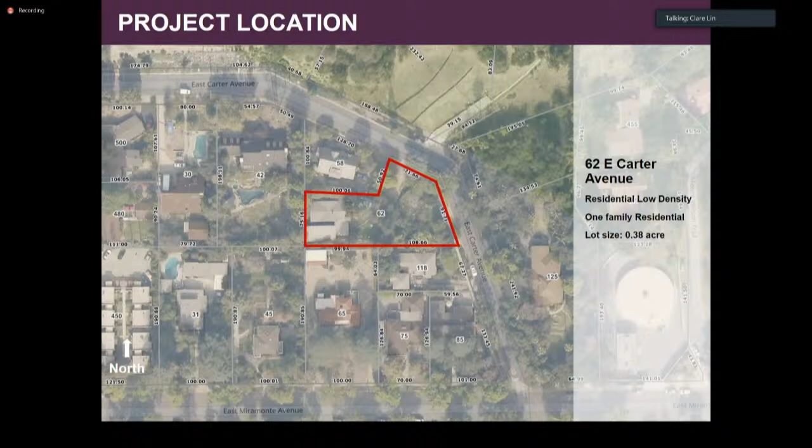The Planning Commission reviewed and approved the project on the property to develop a single family residence and renovate the existing structures back in 2018.

Since then, the ownership has changed, and the new property owner wishes to modify the approved application to construct a 2,330 square foot single story, single family residence, including a subterranean basement and a garage to be excluded from the gross floor area calculation.

The total gross floor area is 4,161 square feet, including the existing structures.

Pursuant to the code, any structure addition to a lot greater than 11,000 square feet in size, resulting in a gross floor area greater than 3,500 square feet, shall be subject to granting of a design review permit.

And the project qualifies for a categorical exemption under CEQA, as it involves additions and alterations to a single family residence.

Here are photographs of the site. The property is under rehabilitation. At the top row, you can see photos taken from Carter Avenue, looking south and looking east.

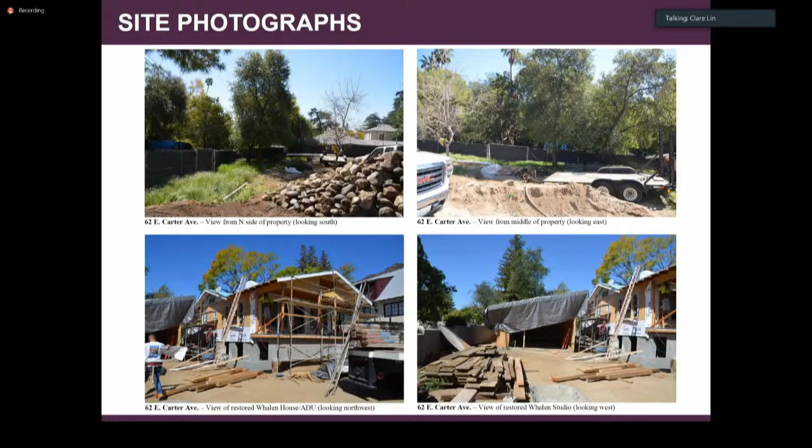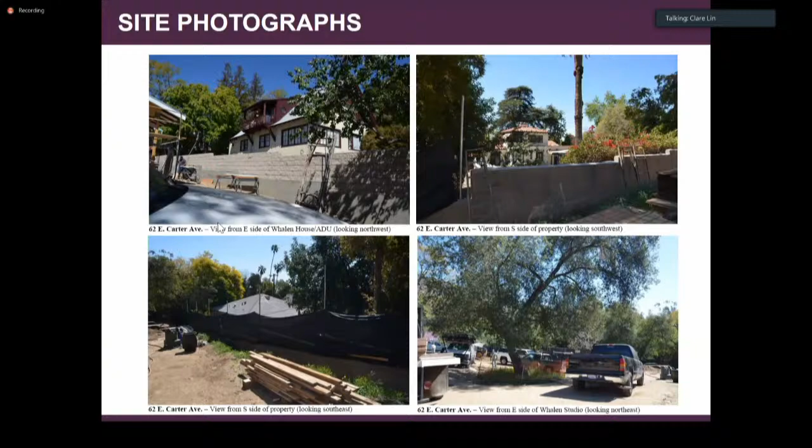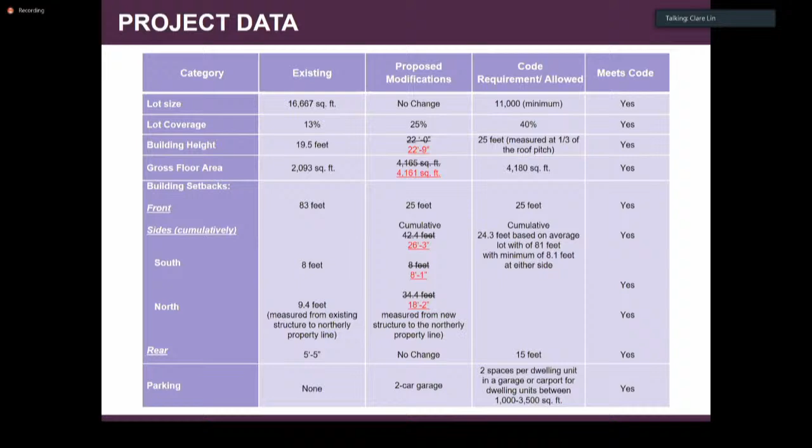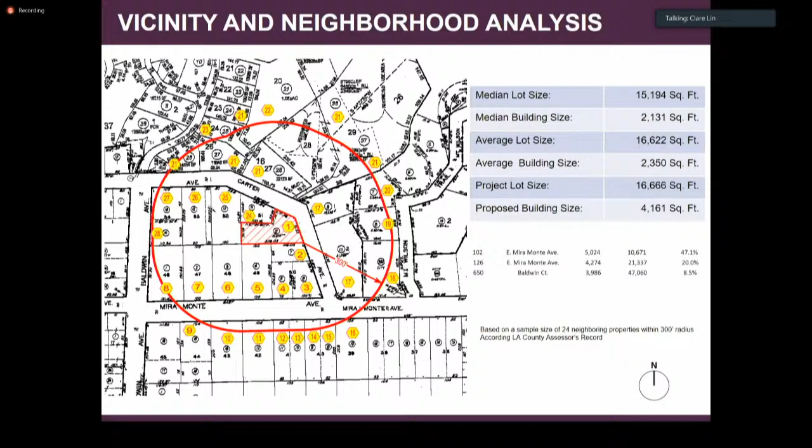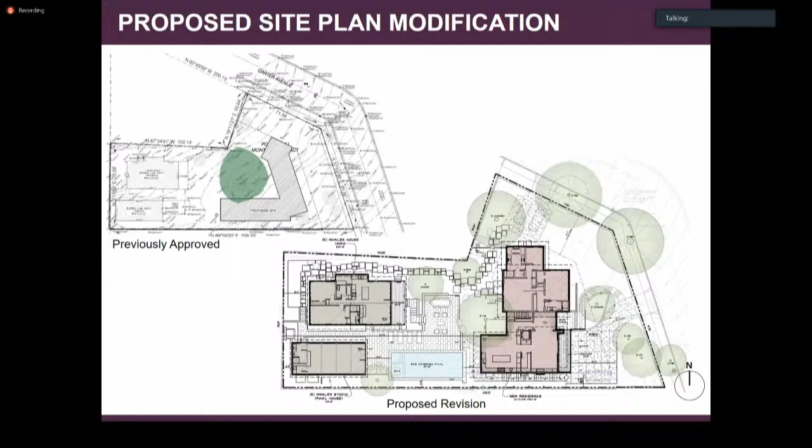The site plan shows the building footprint has been modified to a functional rectangular shape. The next, enlarged site plan shows the required setbacks and the proposed driveway accessing from Carter Avenue to the east, and the location of the protected tree.

The proposed residence is approximately 62 feet away from the Whalen Studio, and both the Whalen Studio and the ADU, the Whalen House, are being renovated as previously proposed and approved.

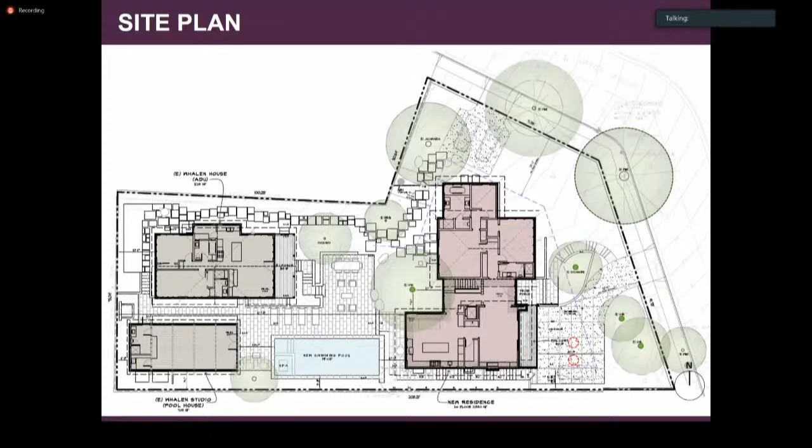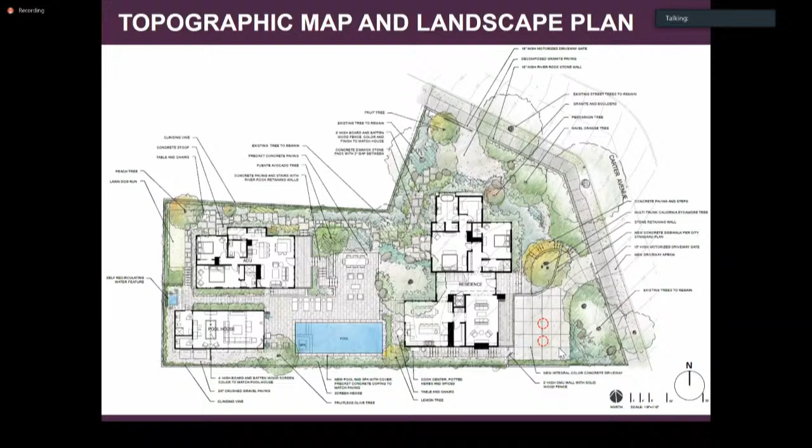A permeable paving system is incorporated in this grading and LID plan. There is a series of drain pipes and a catch basin system that will lead the water on site to a dry well located at the lowest part of the property, at the southeast area.

The dry wells are proposed to be installed under the driveway surface, and all utilities will be underground, which is also included in the conditions of approval.

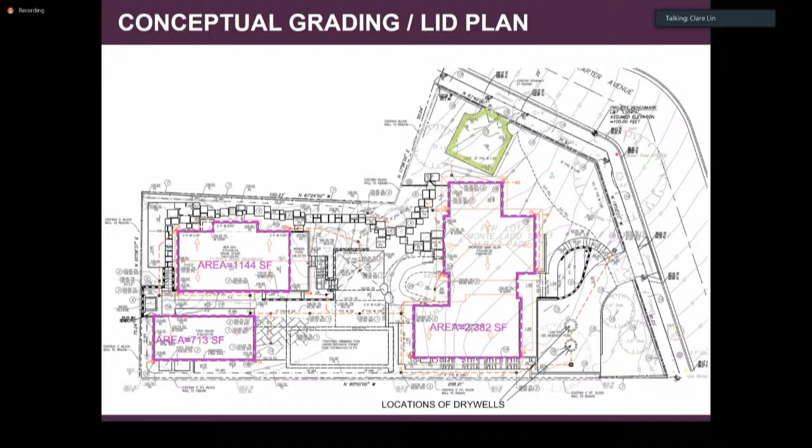The proposed project involves the construction of a new 2,382 square foot single family residence with an open floor plan consisting of a foyer leading to a living room, kitchen, and dining area. To the north is a 2-bedroom, 2-bath with a pantry in the center.

An elevator leads to the subterranean level, which includes a storage area, a laundry area, a bathroom, and a 2-car garage accessing from Carter.

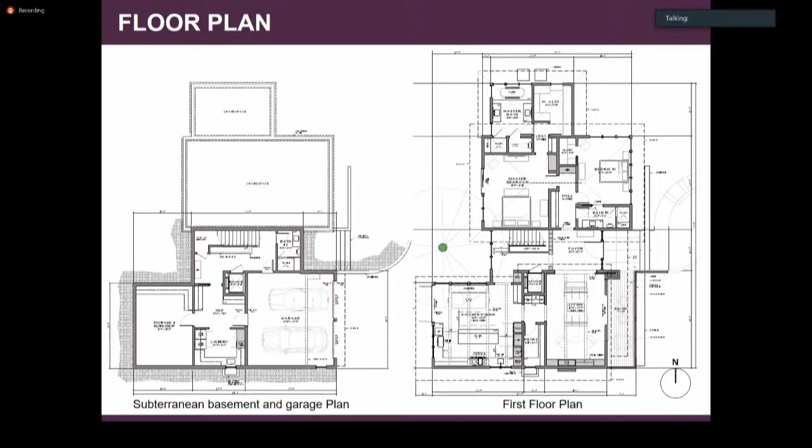The application provided sections with grade profiles, cutting through north and south, showing the garage, the living room, and the bedroom.

The sections on the lower part cut through east and west, showing the side profile of the garage, the kitchen, and the storage basement. We also have another section looking south, cutting through the kitchen.

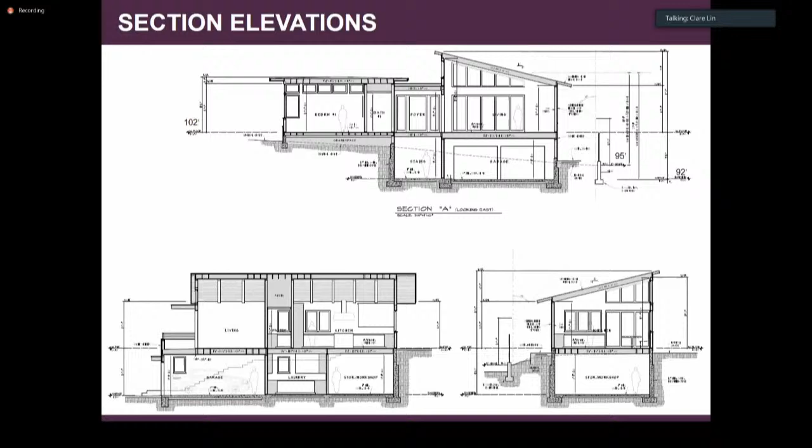Here's the color rendering of the proposed project from the street view, showing the house situated among mature landscape in the neighborhood. The project exhibits the character of a mid-century modern architectural style.

It proposes an asymmetrical roof structure with a shed roof on one side and a flat roof on the other, finished with clerestory windows. The architecture demonstrates clean lines and angular, horizontal composition with a large expanse of full-height windows.

The exterior wall features nickel gap siding responding to the Wayland Studio with vertical panels, and the rear is wrapped with horizontal siding, which echoes the Wayland House. The fenestration is balanced with large, expansive windows vertically and horizontally.

The horizontal clerestory is in the area that is less public. The exteriors are finished in sage green, in a deep dark hue, and natural stone color that blends into the surrounding natural landscape.

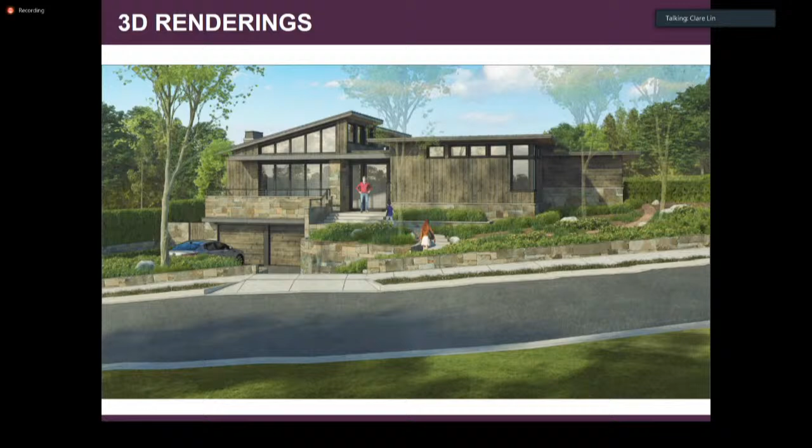Here are the elevations. The east elevation is the street-facing elevation. You can see that the cantilevered deck is...

cantilevered over the garage, and the garage is subterranean below the natural grade, which utilizes the grade change at the southeast end and minimizes visual impact from the street.

The south elevation shows the proposed residence with a low profile, single story design, which minimizes visual impact from the neighbors to the south and preserves the privacy of the neighboring properties.

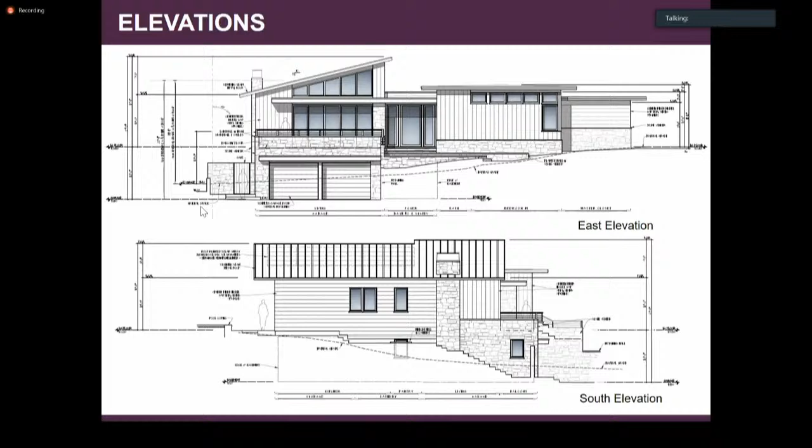This is the west elevation and the north elevation. The west elevation shows the sloped standing seam metal roof and the flat roof, consistent with the mid-century modern architectural design that complements the shape.

volume of the Wayland Studio. And the fenestration system maximizes natural light source from the north and the west, where it opens up towards the central courtyard.

The north elevation is viewing towards the two-story neighbor to the north. The proposed project complements the low profile, single-story horizontal massing.

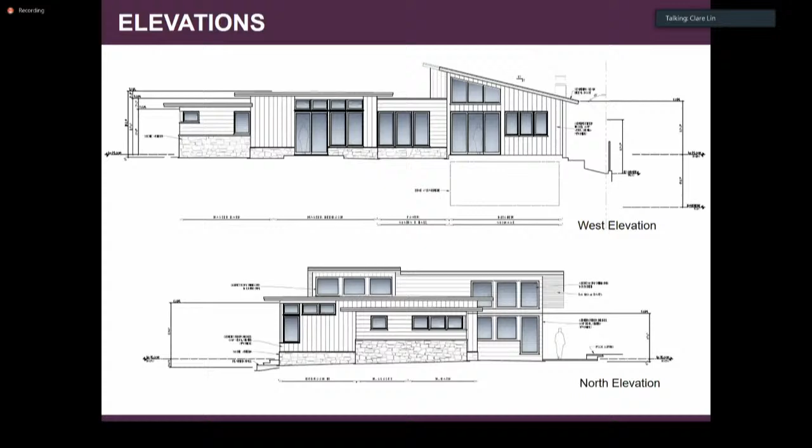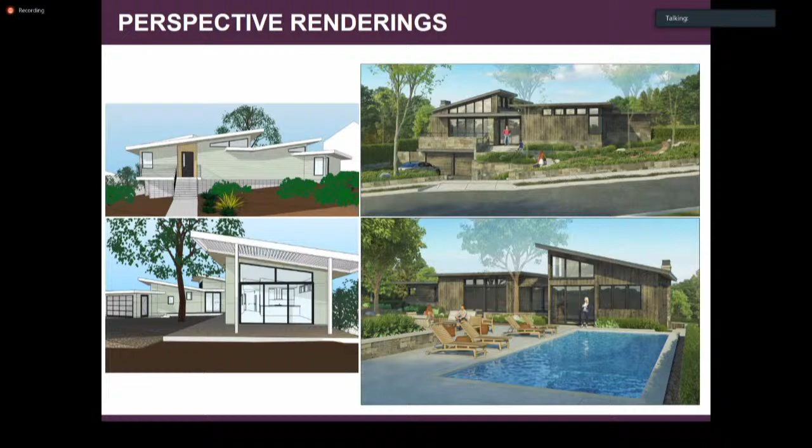A design review finding has to be made in order for the Planning Commission to make a decision. The proposed project is consistent with the general plan designation of residential low density and the R1 standards, including the setbacks, allowable gross floor area, angle plane, and the height requirement.

The proposed residence is a low-profile structure that will not unreasonably interfere with the use, possession, and enjoyment of the surrounding and adjacent properties. The proposed project conforms with all R1 requirements, and its height, bulk, and scale of the addition does not appear uncharacteristic. The 2-bedroom single-family residence has been sized and proportioned to the neighborhood.

The total floor area, while above average in this neighborhood, is still within the top one-third.

The proposed residence reflects the scale of the neighborhood and will not visually overpower or dominate it, as it is situated among mature vegetation, and the addition is well proportioned at a height of 22 feet 9 inches, well below the 25-foot maximum allowable height.

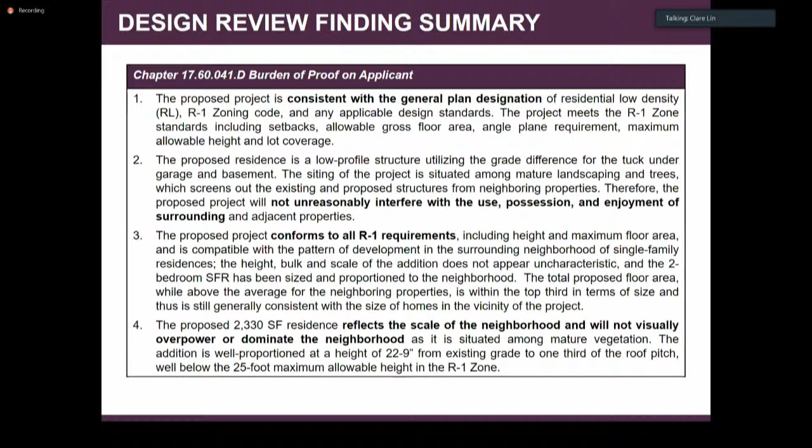The proposed structure is situated slightly higher than the adjacent property to the south due to the natural change in grade, so it will not unreasonably interfere with the public view or the views and privacy of the neighbor.

The project is designed in mid-century modern style, which complements the existing structures. The proposed exterior materials include large expanses of glass doors and windows that are compatible with the existing structure, in order to achieve a coherent project-wide design, regardless of whether they are publicly visible.

The project is not seeking additional relief from the development standards, and the proposed project is thoughtful and noteworthy architecture that is not a cookie-cutter plan.

The project responds to the topography of the site and protects the existing sycamore and Coast Live Oak trees, incorporating the existing structures into the project.

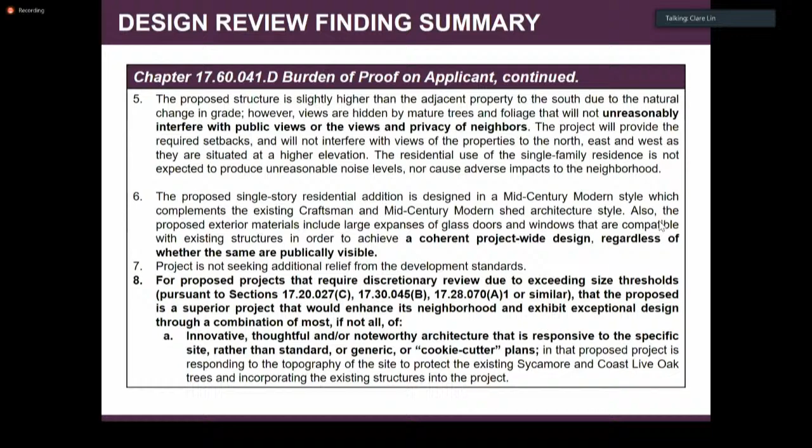The project demonstrates adaptive reuse, preservation, and restoration of a historic structure, and it preserved the natural landscape to the extent possible, minimizing grade change and retaining the protected specimen trees.

Siting of the structure is in keeping with the landform, so as to maximize open space, public views, and the neighbor's views and privacy.

The project proposes a high quality architectural style and architectural detail building material that is compatible with the overall project design, and the project will be compliant with the low impact development and water efficient landscape ordinances.

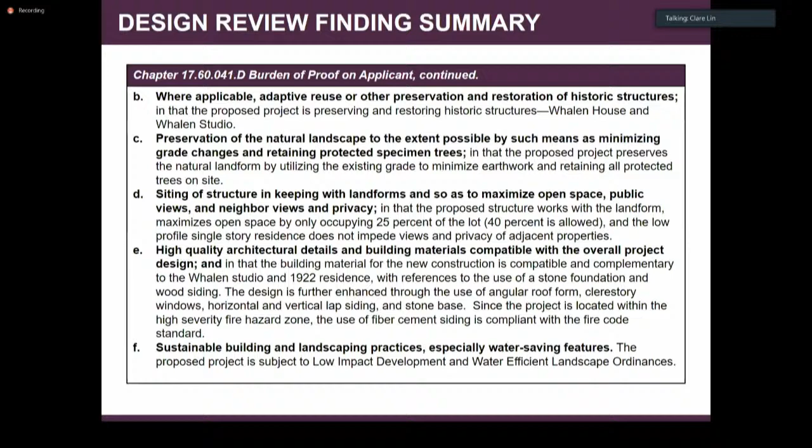The Planning Commission tonight may approve the project, approve it with modification, or deny the request by identifying the findings that the Planning Commission cannot make and the basis for rejecting those findings, or continue the subject project and provide direction to the applicant and staff.

Staff is recommending that the Planning Commission approve the modification to Design Review Permit 1704, subject to the conditions of approval in Planning Commission Resolution 2113.